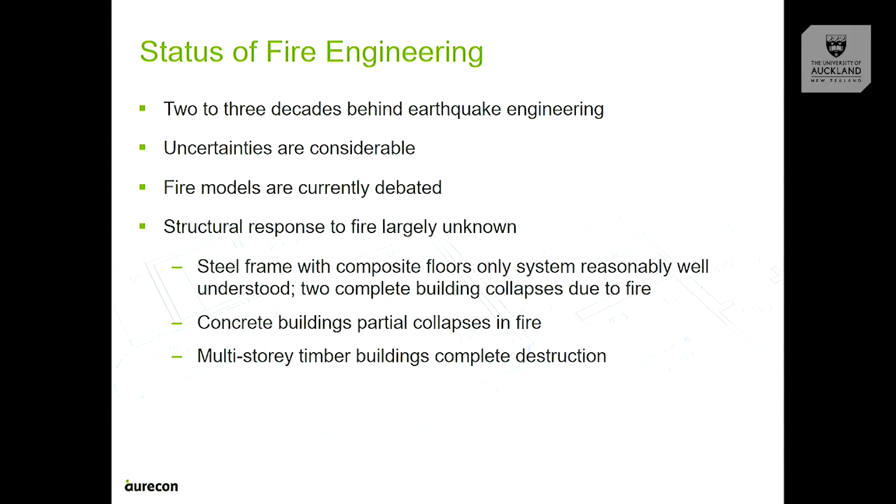So just before I start, because the theme says misconception, I'll play a video.

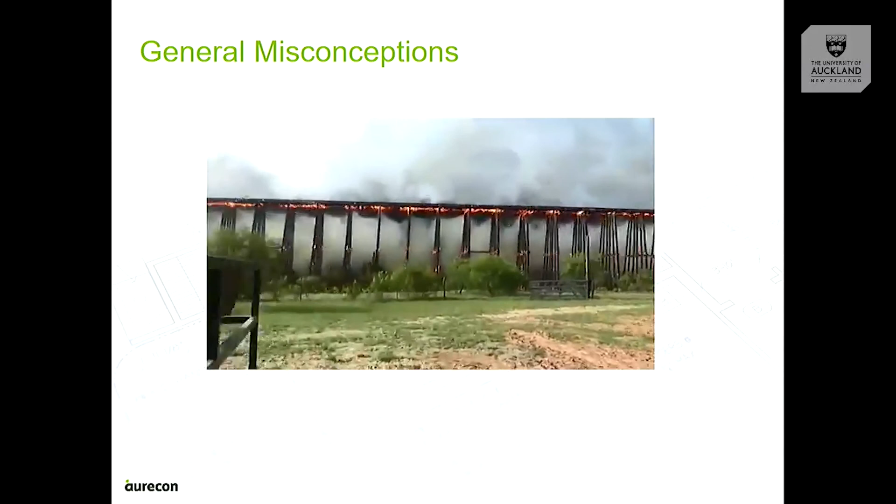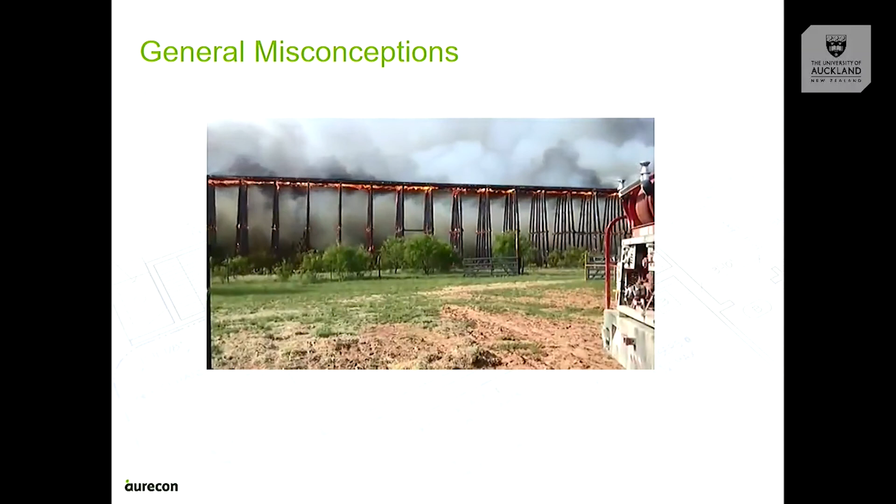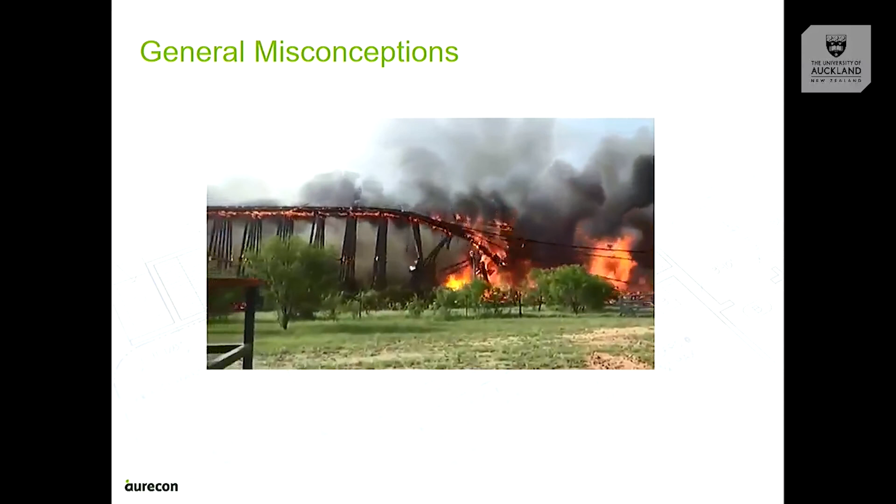This is a funny video I found online, and it illustrates the general misconceptions we have about structures and fire. This is a timber footbridge, and we can see the whole bridge is actually on fire. But what are the chances of that happening? It is happening - let's watch a little clip, and I'll explain at the end. So the firefighters are there, and this is what we have in mind: once there is a fire, the whole building comes down all at the same time. That's the general misconception we have as either structural engineers or fire engineers.

So that's what really happens in a fire, not the previous scenario. That could happen, but not in a building where you have separate fire cells, like we generally have here in New Zealand.

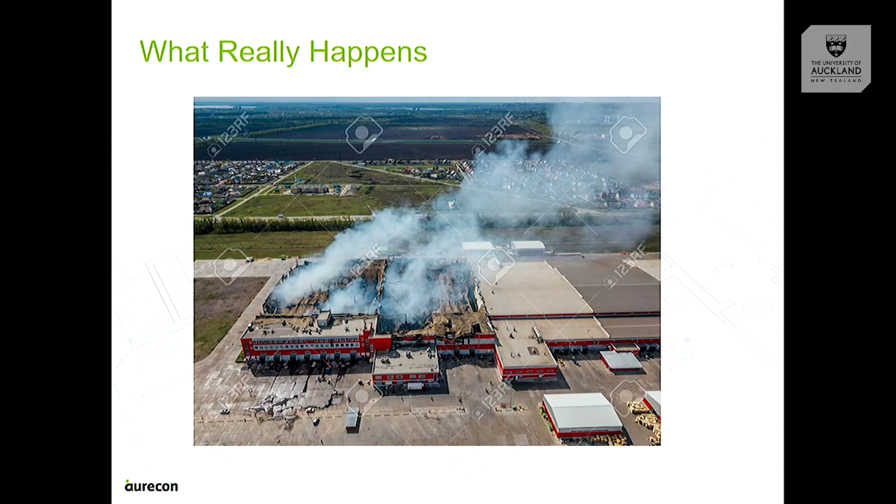So I'll just start based on the New Zealand Building Act. The Building Act basically is what holds us as professionals. This is where we tend to go to if there is either a dispute in our design or if we have issues - we go to the Act, which basically supersedes everything else. And the clause B1, which structural engineers design to, and clauses C1 to C6, which fire engineers design to, they're almost interwoven. But clause C6 is almost the same as clause B1. And why is that the case?

Clause B1 3.3 basically says account shall be taken of any condition likely to affect the stability of building elements, and it cites what - including, you can see the one in red, fire. It lists the rest, but fire is actually there. And clause C1, C6.1 says the building must maintain structural stability. Now, with structural engineers, we don't sign clause C6, but we sign clause B1. So whose job is it to make sure the building actually stays stable during a fire? Is it C6 or is it B1?

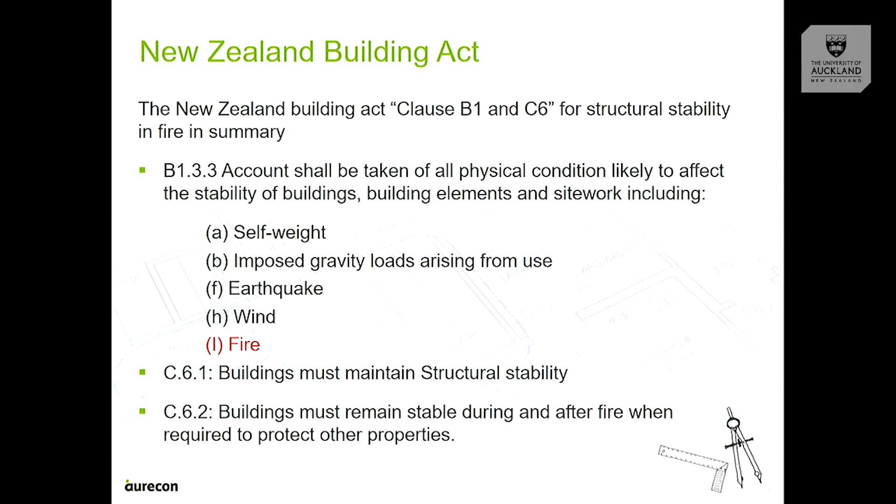Anyone? B1. Well, you can see C6 says the building must maintain structural stability. So why? Who's... not sure? Okay, now if you go into a fire engineering forum, they say, 'Oh yeah, it's there in our clause C6, we should sign it.' But then that's where you get the overlap. So most of the time you see buildings which are basically prescriptive based and not performance based. It's hard to tell who's meant to sign clause C6, but we sign B1, which covers fire as well.

And a bit about fire engineering, like I said - in fire engineering there are two main documents used to design buildings here in New Zealand in terms of fire. The first is called the acceptable solutions, and that's where you get your clause C1 to C6, and the verification method. So think about an ISA, okay? An ISA is almost similar to your acceptable solutions - you have different criteria you need to meet, and at the end you get the results.

You can see your verification method as a DSA - you still follow those requirements, but it's a much more detailed design. So the majority of buildings, for instance your residential housing, some warehouses as well depending on the height, and also your regular apartments - most fire engineers would tend to lean towards C1 to C6, or the acceptable solutions. And why is that the case?

Now when you see, for instance, if you have an ISA or a DSA and you get a client, obviously you want to get an ISA for the fee of a DSA, which is easier for you to do. And that's the main reason. Because if you go in with the verification method, you have much more rigorous things to do - you need to get a fire engineering brief, you need to speak to council, you need to get information also from the fire service, which is now they call them now?

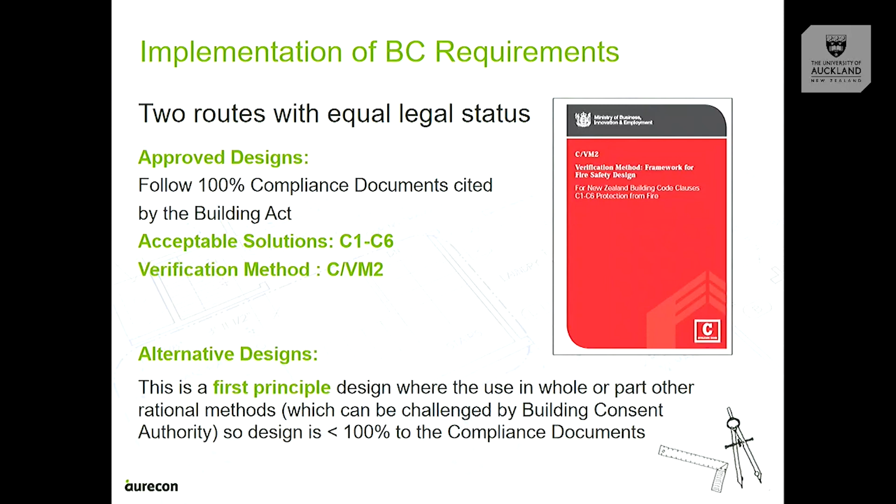Now, what is fire? Okay, for there to be fire anywhere in the world, any location at all, three things need to be present. You need to have heat, you need to have oxygen, you need to have fuel.

Fuel is not just your regular PMS, fuel could be anything. It could be a piece of paper, it could be firewood. Without the heat, there is no source of ignition, there is no way the fire is going to start. That is why, without these three components, we need to make sure during our design we check if one of these three are absent.

No matter where the building is or what it is, you're not going to have a fire in that building. Now, when you design your building and you have a stair or stairs, in general, do we keep materials free, say, under the staircase or in a stairs location? Anyone, do we do things like that?

No. So why do we fire rate it? Or why are we required to do it? It's an exit, but there is no fire, there's no fuel. Depends which way you're fire rating from. It's not an internal fire, it's external fire protecting. So it's an external stair.

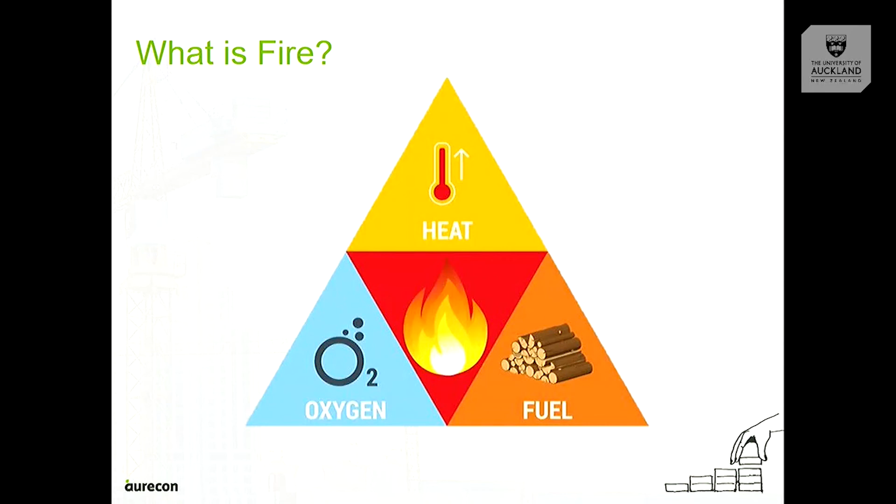Fire growth. Okay, so think of a piece of cigarette, or a lighter or whatever. If you light a match and burn a piece of paper, it's different from having a fire in a building, and that's because there are different stages of fire growth. So the first stage of a fire is where you have an accident. Obviously, no one wants to burn any building down except it's arson. It's an accident, something happens, and the fire gets lit.

And the next is the ignition stage, which spreads up to the flashover stage. So the point we're more interested in is called the flashover stage, and that's where the fire is hard to control. Take, for instance, you burn a piece of matches, it's not going to get to the flashover stage because there isn't enough fuel, or there might not be enough oxygen to get to that particular level.

So by the time we get to the flashover stage, the fire would be almost uncontrollable. It's going to be very difficult for us to control the fire, and that's why we need to get the fire service in, and that's where our members start getting to their limiting temperatures and things like that happening.

But looking at the curve, in majority of cases, when you have a sprinkler system, the sprinklers have been triggered by the heat in the room or wherever they're located, before it gets to the flashover stage, your sprinklers would have been activated. That's why majority of the time, the fire doesn't grow to an extent when you have a sprinkler in the building whereby it's going to be uncontrollable. You can see the curve, the dashed curve, which is the curve for a fire having a sprinkler system.

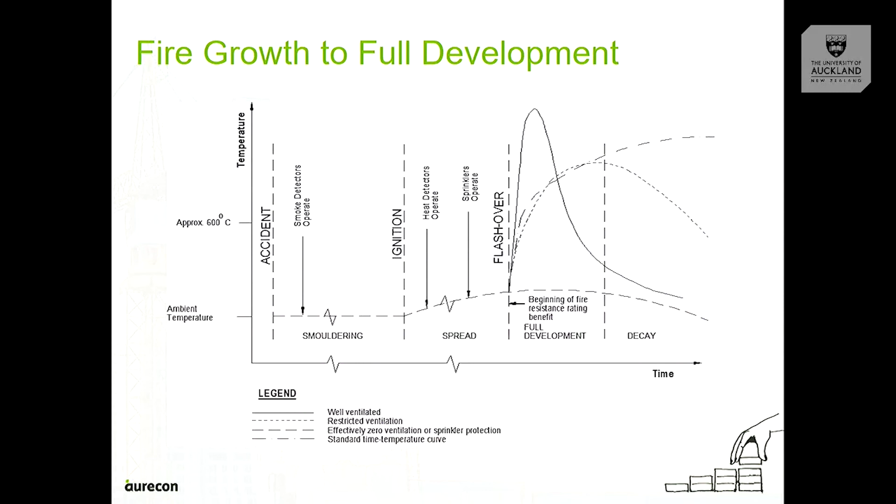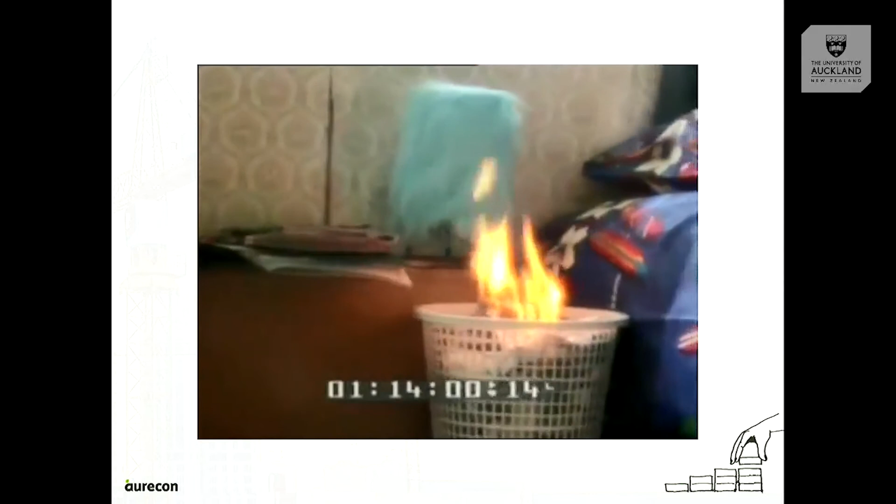So this video again shows how fast it takes for a small fire, starting from a piece of blanket or something, to generate into a very uncontrollable fire. This is an experiment basically trying to see how fast it's going to take for it to become an uncontrollable fire. They just lit a little piece of blanket and it keeps burning.

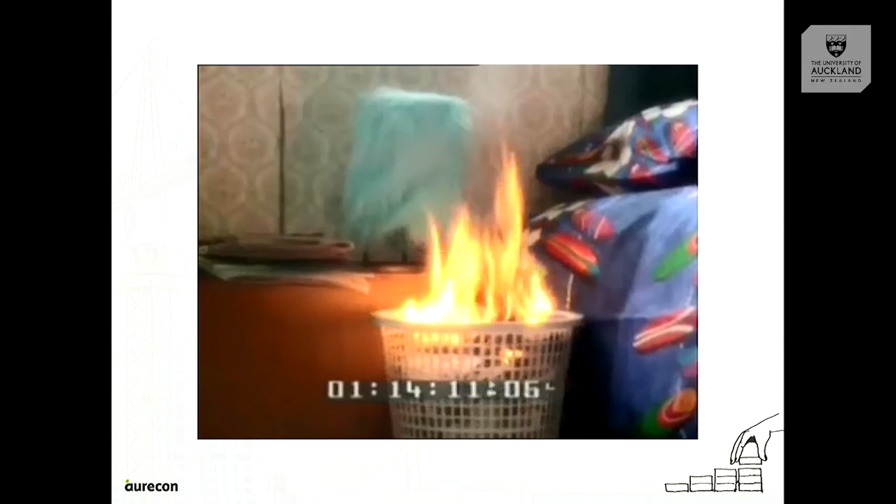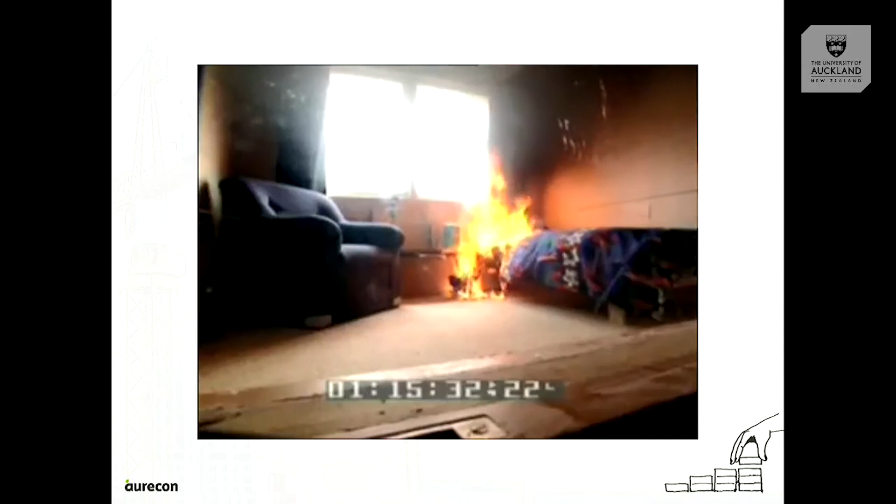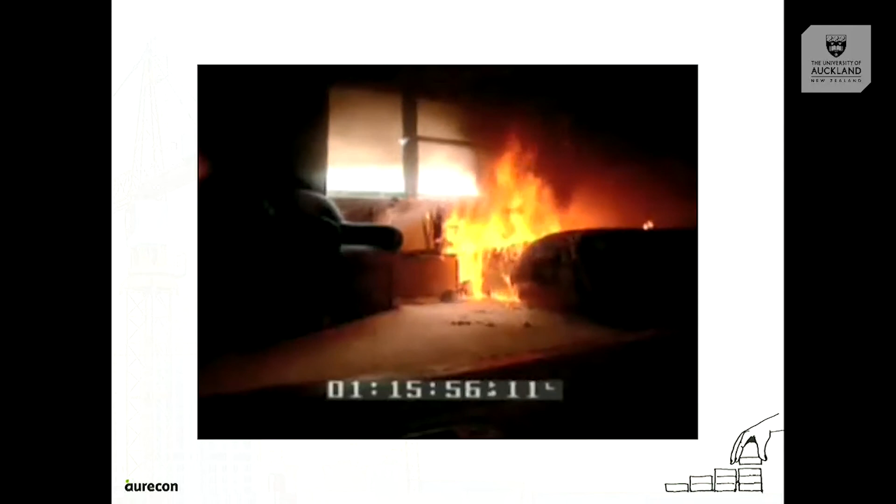Now it gets to the blanket, and this is a full room. It keeps going, and there you go. That's where it gets to. In less than about 5-6 minutes, it gets to a full fire which they cannot actually control.

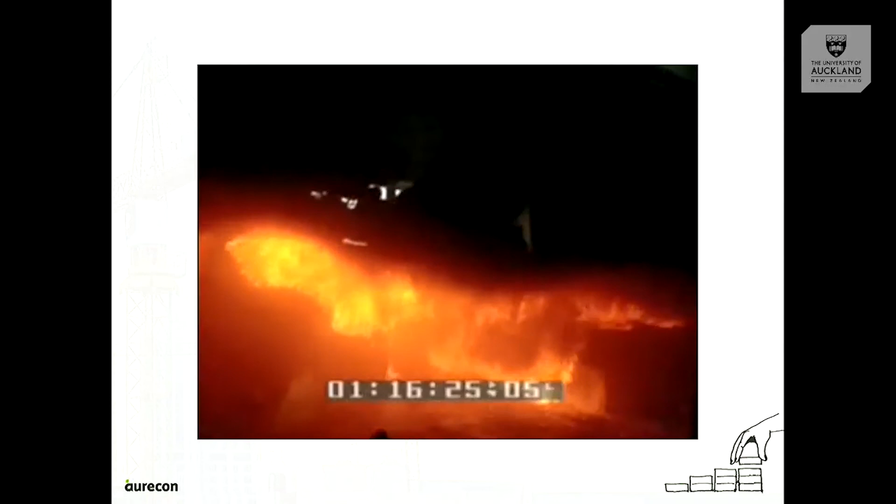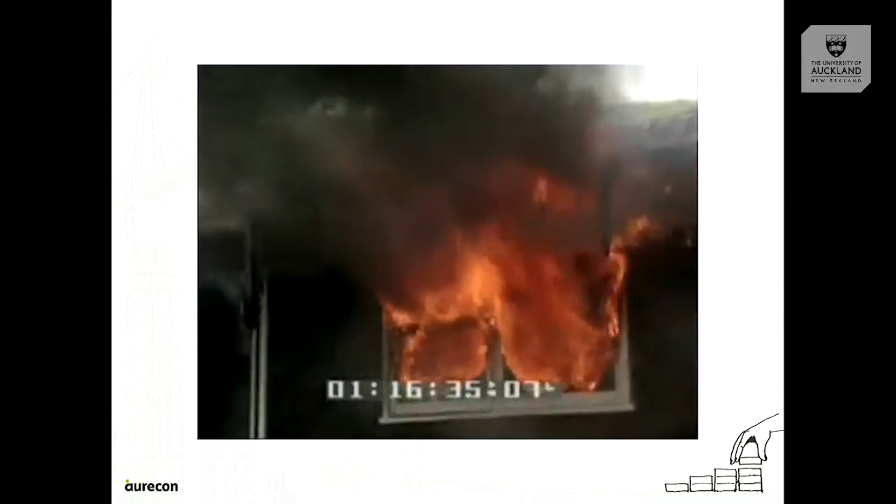This is what really happens in a real fire. It starts from little, and that's where you get a flashover stage. All your windows start to break. Why? Because it needs more oxygen. With oxygen, you get more fire in your building. And that's all about fire engineering.

What we usually do in most cases is analyze individual members without looking at the global structure. That way, we often don't know how the whole system works as one, not just individual elements. The fire resistance of the system is typically higher than that of the individual members. So if your beam has been designed using AS4100 and rated for, say, 30 minutes, the system might be about 40 or 60 minutes in any case.

But how do we do that? We need to do more analysis. We need to get information from the fire engineers - for instance, we need to know what the fire load is. We don't just look at a small piece of a room with a fire.

Inelastic response will occur in fully developed fires as well, and detailing is important with unprotected beams. I'll talk more about this - it has to do with your connections and how they're actually detailed for fire.

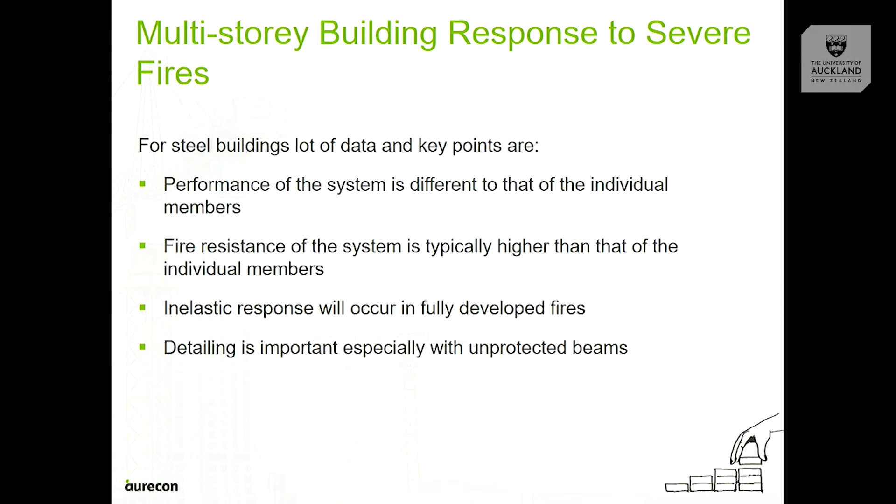Steel columns - how do they behave in fire? What do we know, and how do we get the information? The gravity load and wind load definitely apply during the fire. Not too many times do you get both a seismic event and a fire event at the same time, but there will always be gravity loads there, and there will be wind.

During fire, what happens is the column heats up - this is for structural steel - and it expands. Once it expands, you'll see the floor above starts to jack up. So basically you're having a fire in a column, and this column starts to jack the floor above as it expands. The axial load starts to increase gradually, and the restraint of this expansion increases the column's compression load, meaning once it starts to expand, you get a higher compression load in the columns.

The effects on the column depend on whether the column is very strong and stiff - it jacks up the floor. But if it's not strong enough, it just squashes or buckles. So those are the two things that could happen, depending on how the column is restrained, whether the temperature is high enough to expand the column, and the rate of expansion based on the temperature in that particular room.

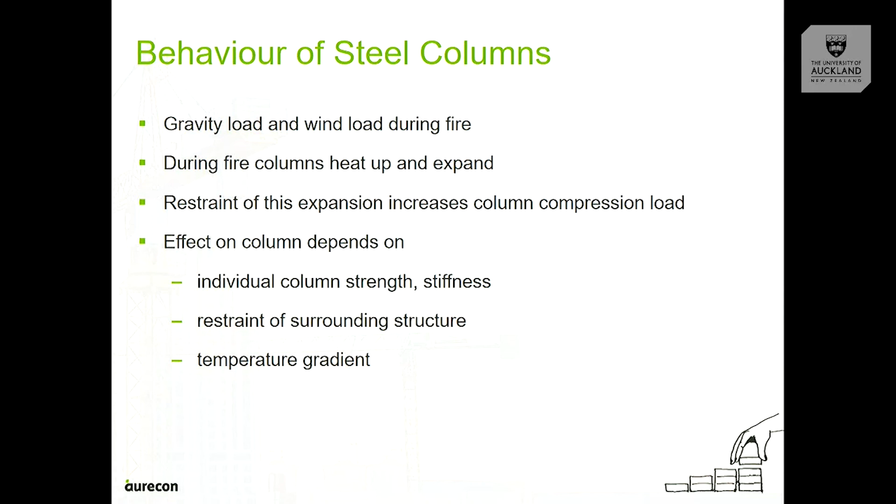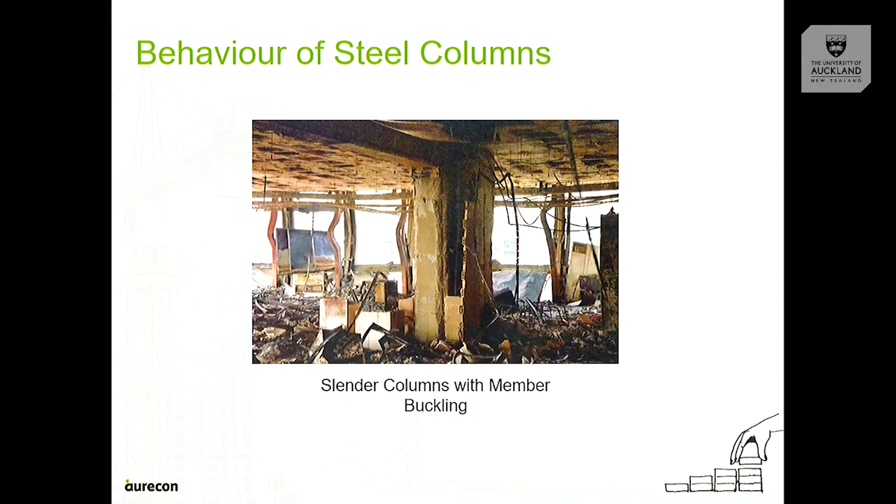So these are what we know. This is a test - a very famous test done in the Cardington fire down in the UK. These are slender columns - what happens with slender columns, remember, is they actually buckle. I'll get a much clearer picture in the next slide.

But for stocky columns, what we noticed, or what's usually the case, is at the top you actually see local buckling of the particular column. The column tries to expand, and once it gets to capacity, it drops - that's where we get the local buckling of the actual columns.

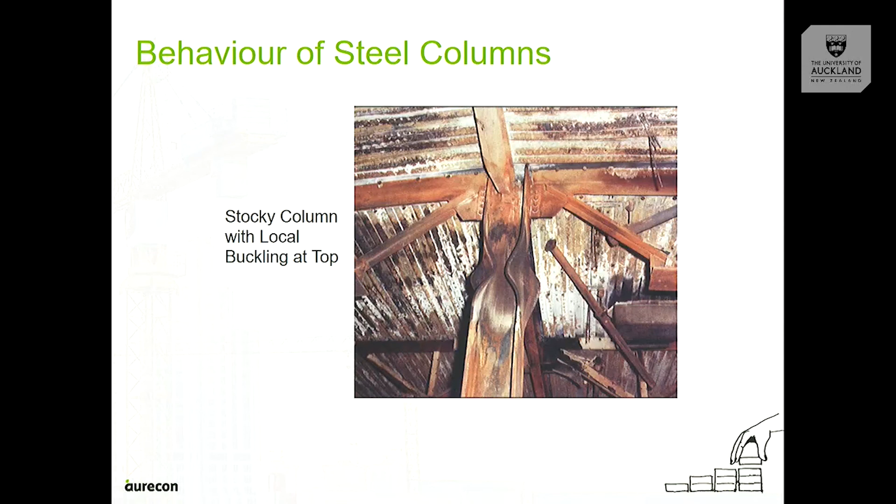So what about the behavior of braced steel systems? The same way we have our members when we design for seismic or earthquake, we have our EBF and CBF. So what happens to the EBFs or the CBFs in a fire? Remember, the majority of these members have been designed to take our lateral loads, which means the gravity loads in this system would be minimal.

And in most cases, the take home would be we can actually leave them unprotected. And the way we do that is clause 3404. There's a calculation on the limiting temperature, and once we get the limiting temperature of the members, we could design the members and get the fire resistance or structural adequacy of that particular member in a fire.

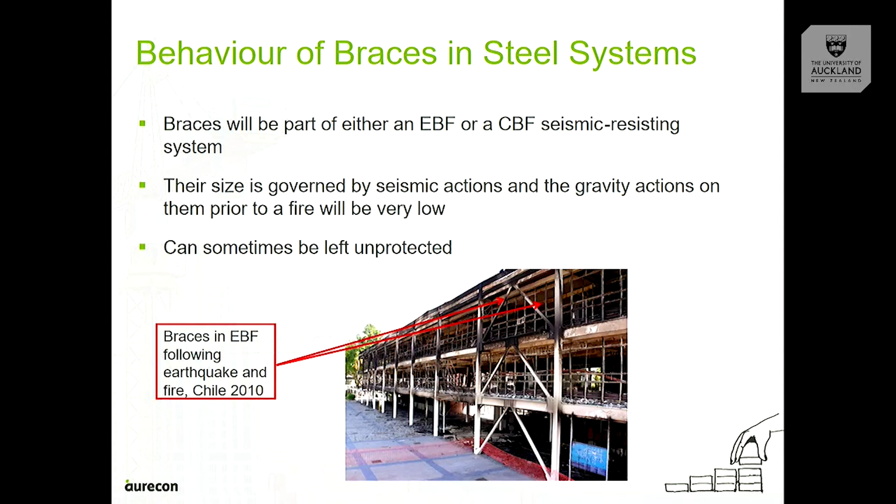Also, sometimes due to different bays we would have a fire cell, or have the members in two different fire cells. A fire cell is basically a room which has been fire rated all around and at the top, which means if it's fire rated for 60 minutes, the structure or the members blocking the fire wouldn't collapse till after 60 minutes. So if you have a bay with a wall rated for 60 minutes, and there's a fire here, the other bay would stay intact for more than 60 minutes. So when you have the EBFs in one bay with different fire cells, you could actually leave them unprotected. And what about the steel beams?

During the fire load, as well as wind and gravity, the temperature gradient causes the beams to sag. For most of us who've done work on the slab panel method, we see a lot of deformation of the beam, and that's due to the fire as well. During fire there's an increase in temperature in the beams, and what happens is at the supports the beam starts to expand, but at mid-span it buckles in or deflects very much, which is very visible. This is the same photo from the Cardington fire in the UK.

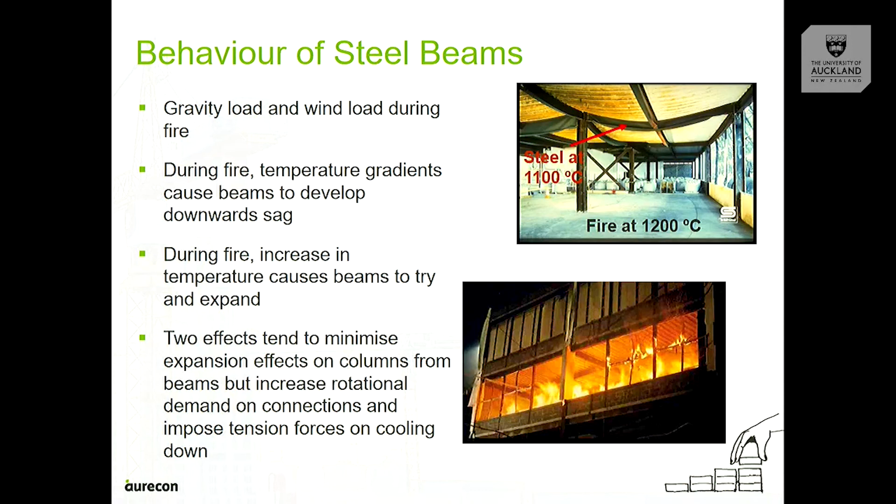So the system tends to minimize the expansion of the column from the beam, but the rotation demands on the connections get higher. At the supports they start to expand and start to twist, and that way your rotational demand means the connection itself has to be well detailed. This is why I talked about the connection itself.

So the behavior of steel frame connections - during the heating phase, the connections are subjected to negative rotation and minor axial compression. Once you have your beam-column joint and the beam starts to expand, it puts a lot of tension into your actual connections. This is why the detailing of the connection, or the rotational detailing, has to be well done. But the good thing is the detailing we currently use for seismic rotations in columns is actually sufficient for the fire design of these members.

The connection with no inelastic reserve strength in fire must be avoided. It's going to be catastrophic if your beam-column joints fail in a fire. That's one of the worst case scenarios that could happen in a fire event.

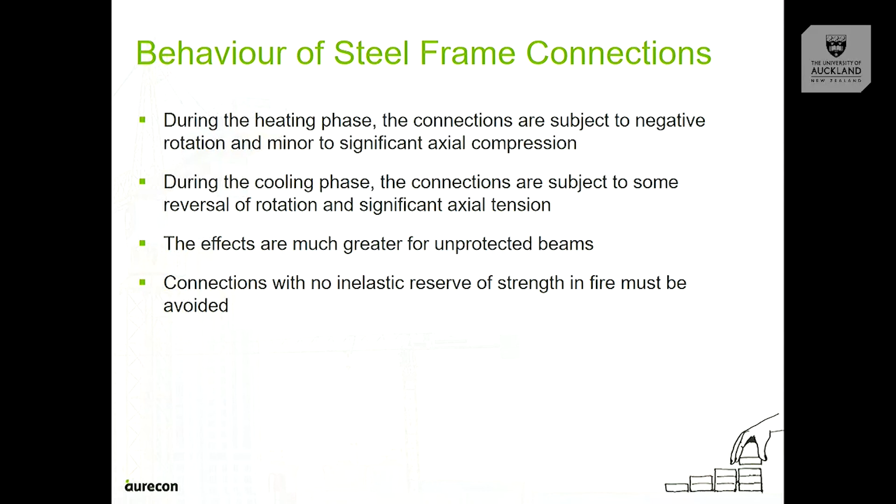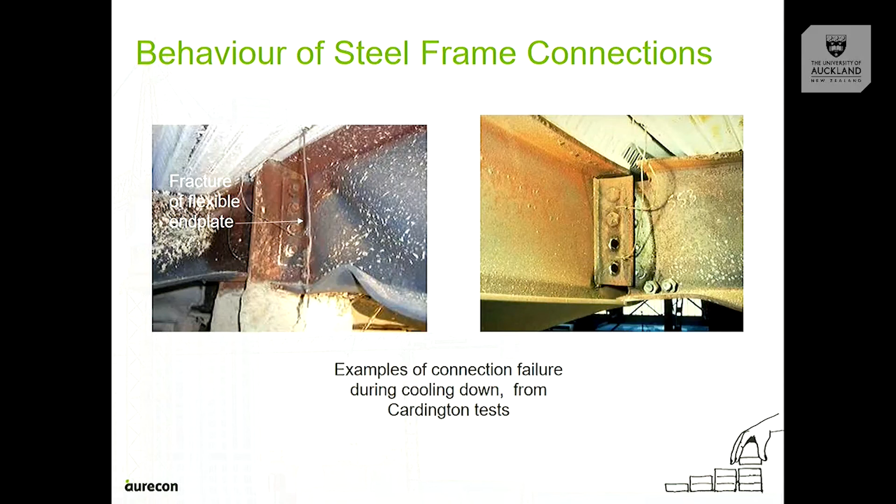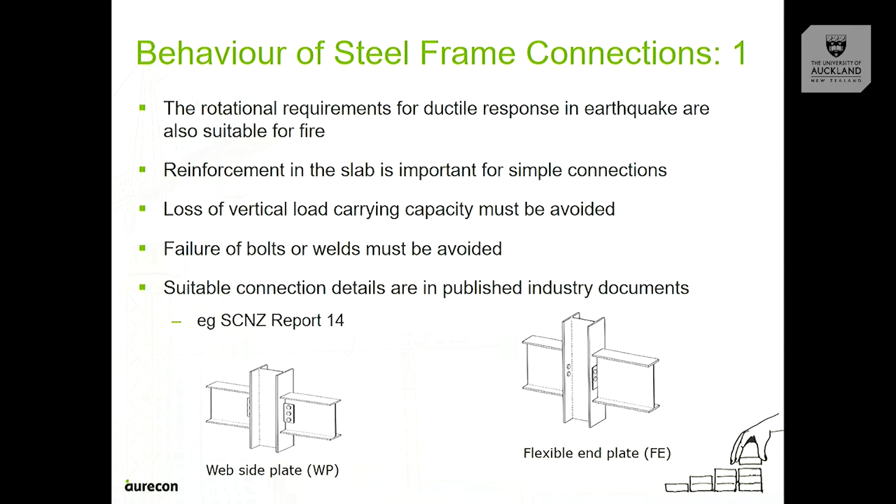So first of all, the rotational requirement for ductile response in earthquake is suitable for fire as well. And we can get some design materials using the SCNZ Report 14.

So what about the floor systems? How do they behave in a fire event? The majority of tests done are usually on composite floors, and the critical direction of fire for the floor system is usually underneath. That's why in fire engineering, when you fire a member, you go from the underside of the member.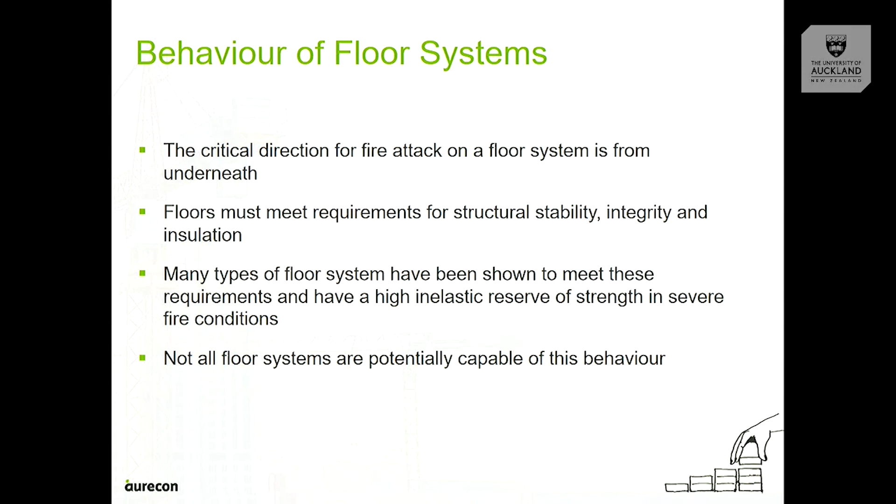So if, for instance, this is a fire cell, what we need to do is make sure we fire the underside of the particular floor. Not all floor systems are capable of this behavior. For most concrete floors and composite floors we understand the behaviors, but there are some particular floors which are questionable, and I'll get to that in the next few slides.

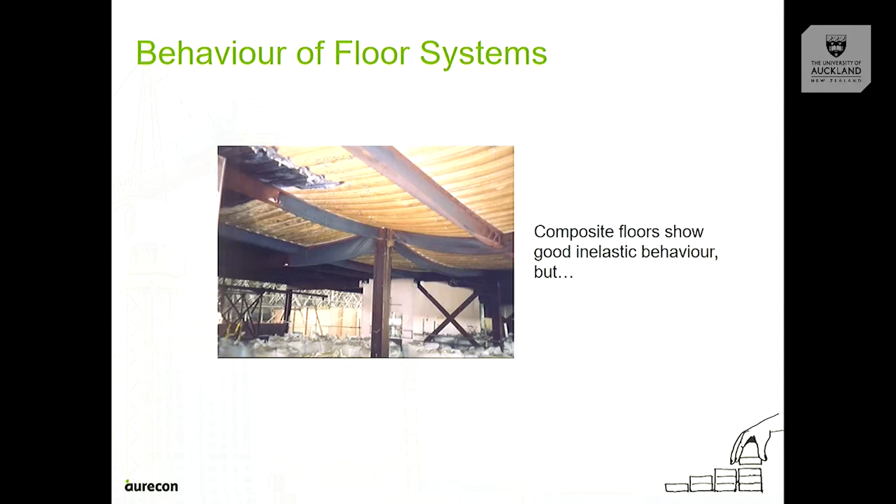So a composite floor shows good inelastic behavior. We can see the floor didn't fail, the beams just sagged, and those beams are all unprotected. That's exactly what happened in the experiment. But we can see at the top here, left-hand corner, the major cracks in the floor.

Now think about it, if this were, for instance, an apartment, and that's your kitchen, and probably your neighbor had a fire or something, and you come and walk into your kitchen and you see your floor sagging in such a way. Obviously, you're not going to be happy about that.

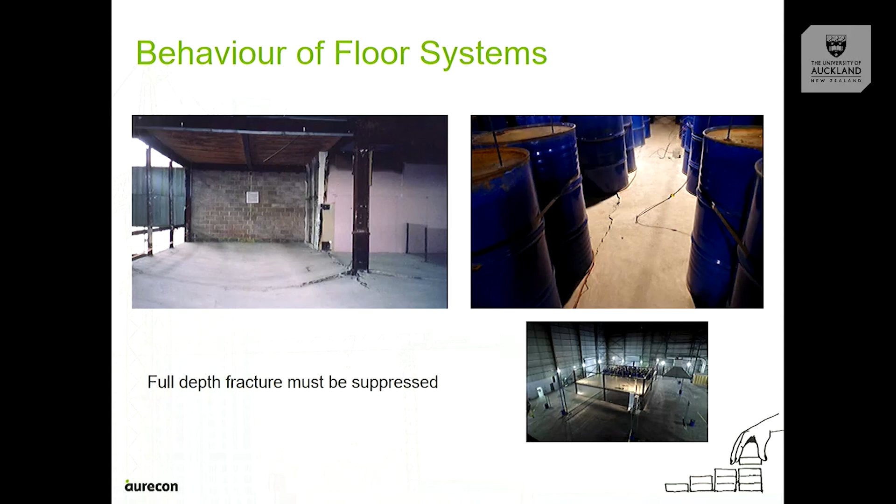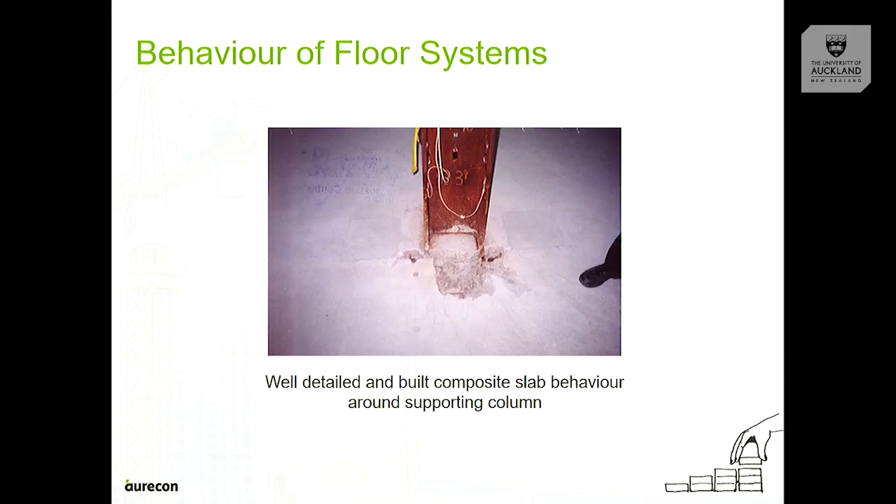This is one of the reasons why during your detailing, at the location where you have the columns, we need to have some extra tension members to help in the support so we don't have this kind of punching shear we're having in that location. So a better detail would look like this. When we have the bars, that's why we have the minimum cover during design, and also the number of bars - I think HD12 is the minimum - you put in your floor to make sure you get that tensile capacity, which would be increased due to fire.

Your tensile demand would be increased, sorry. Unprotected steel behavior in severe fire.

So we've tried to understand how these sections behave in serious fire. First of all, exposed steel elements may reach close to the temperature of the surrounding gases. So usually, if the room is about 1200 degrees, the unprotected steel would be about 0.95 times whatever the gas temperature is. This is just a kind of an estimate to know what temperature you're going to be getting.

The beams will always sag downwards, that's what happens. The columns would always undergo axial expansion, but once it gets to its ultimate state, it actually squashes, or you could get local buckling, depending on how it's been restrained. The extent of deformation depends on the member shielding by effective radiation barriers. Radiation barrier could be your intumescent paints, or boarding all around your members. If directly exposed, what expected maximum fire temperature and duration would you get?

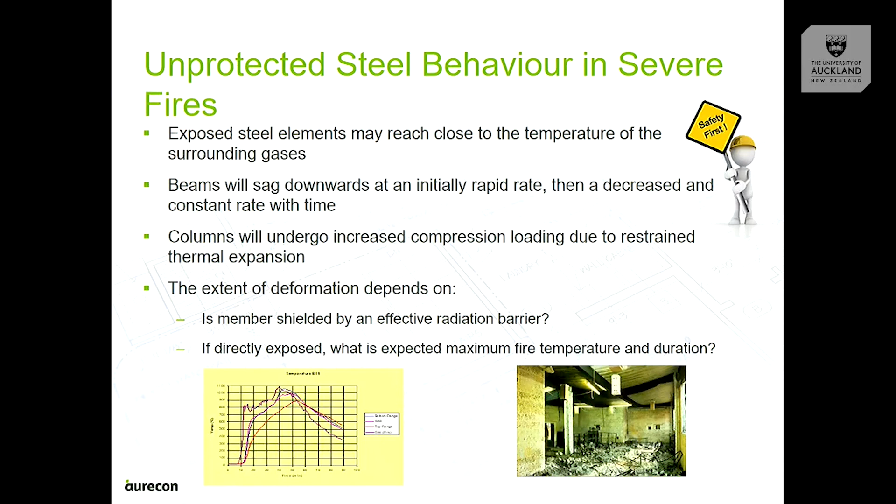No one knows, except you design it, not by prescription-based, but by performance-based. What about RC concrete? The majority of the people in the room are all happy with their reinforced concrete design in terms of fire, but then...

Again, 3101 section 4 gives you different sizes and different thicknesses of your members, but there are ways they could actually be engineered from first principle, and we can actually come out with a smaller size compared to what is actually in the code. This is where you get back to your alternative design or your first principle design as a fire and structural engineer.

So solid concrete members are robust in fire. The only take-home is for hollow cores, it's a bit questionable currently. There's been quite a few research on hollow cores in terms of fire, but it's still a questionable material.

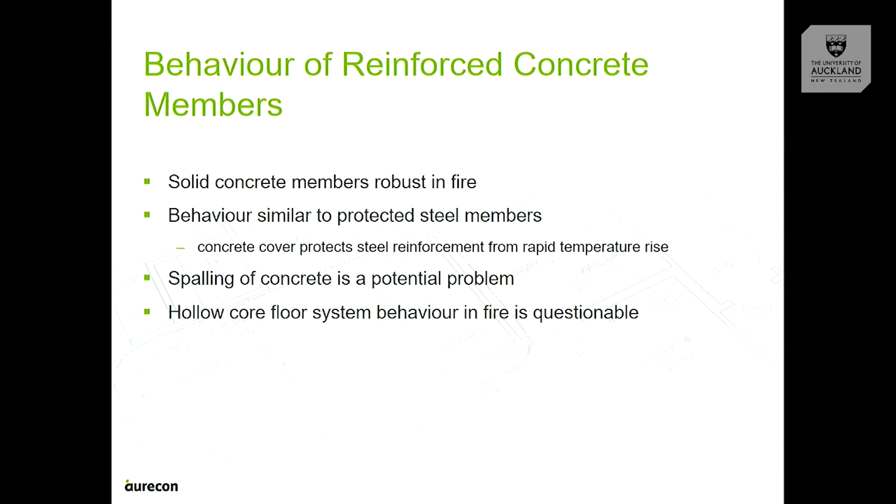And one major issue we have with concrete is spalling in fire. So what happens is, during a fire, all the water content gets dried up, and due to that, you get spalling of the concrete. Could be your columns or your beams.

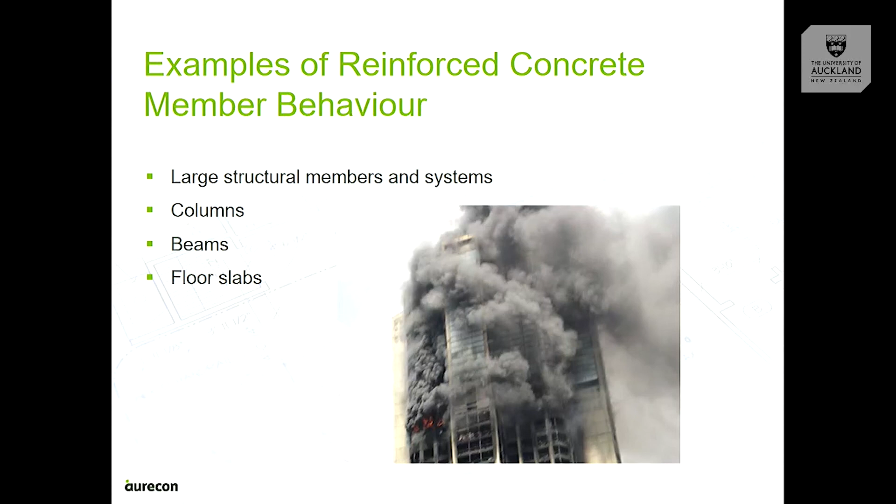Examples of reinforced concrete members behavior. So large structural members and systems: columns, beams, floor slabs. This is a full concrete structure. It's hard for it. It depends on the various elements that would determine what we're going to expect from a concrete building.

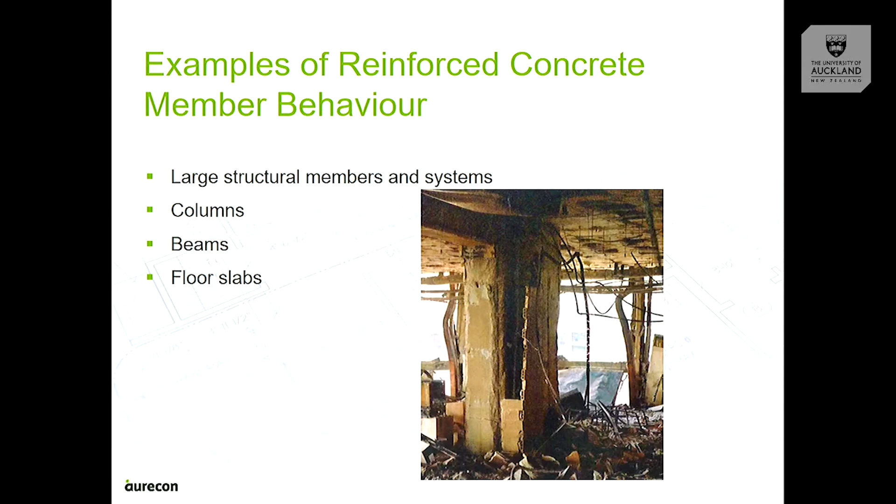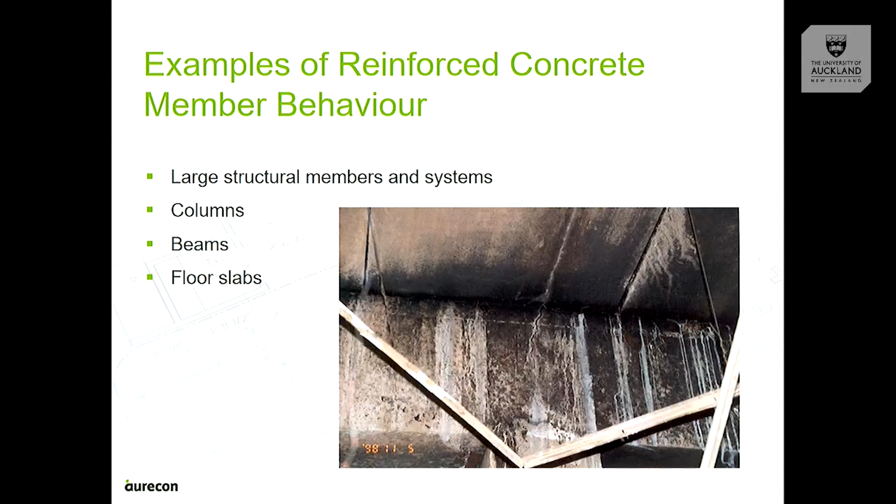And what we understand is the columns usually either expand and then contract, or we can have spalling of the concrete itself. For the beams, usually we get cracks, and these cracks are induced by the expansion of the concrete itself and also the contraction of the concrete. So once the concrete gets heated up, it loses all its water content and starts to crack. And once you get a little bit of crack, it propagates to the other parts of the concrete.

And this is one of the floor systems which was mentioned previously. The floor slab, although the majority of the time they perform very well, but not all the time.

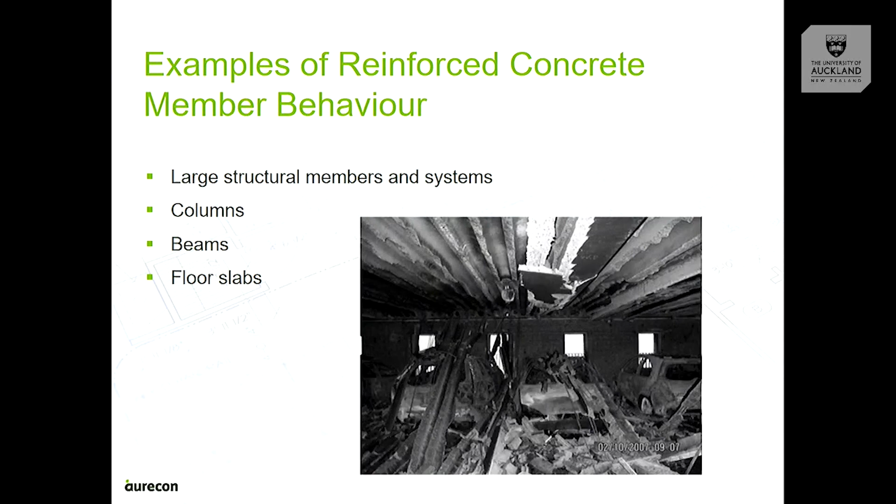For the behaviors of timber, the exposed surface char rate is well known. We understand timber and have calculations to get the char rating of a timber structure. Individual member fire resistance is similar to the fire resistance of the entire system, which means for a member to fail, it's most likely the entire structure fails, since the structure is mostly dependent on individual members for a timber building.

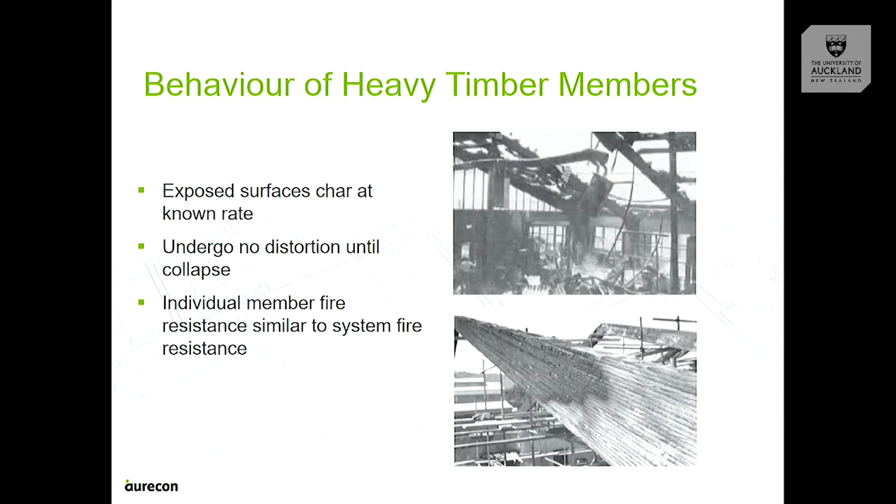Timber wouldn't undergo distortion like a steel section that starts to sag, or concrete that starts to crack. For timber, it just gives up once it starts to char and reaches a rating whereby it cannot hold anymore, it just collapses, for instance for a timber beam. So most of the time, we understand the behavior of this material in fire.

Individual sections of lightweight timber, which we use for residential buildings, may contribute to the fire load. So if you have, say, a lining which is not fire rated, the timber itself in the lining contributes to the fire load in that setup. That's why for lightweight timber used for residential buildings, the behavior is pretty well known.

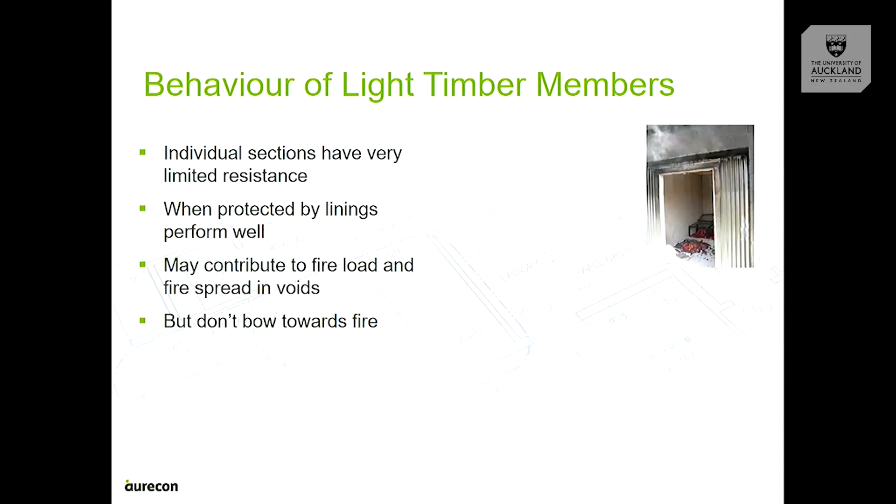These are some photos from fire tests that were done, showing how these timbers actually collapsed. This is a steel portal frame structure, a warehouse, and this is a concrete frame building, a concrete structure as well. Both of them actually collapsed in fire.

So which of these structures do you think has a better capacity, or would perform better in fire? Is it the one on the left, which is a steel frame building, or the one on the right, which is a concrete building in fire? Which one?

Is this a laminated beam? No. So the left one here is a steel portal frame building, and the right one here, it's very difficult to see, sorry, the right one is a concrete building. So which one do you think, a steel portal frame building or a concrete building, will perform better in fire? Concrete - all right, everyone says concrete. Well...

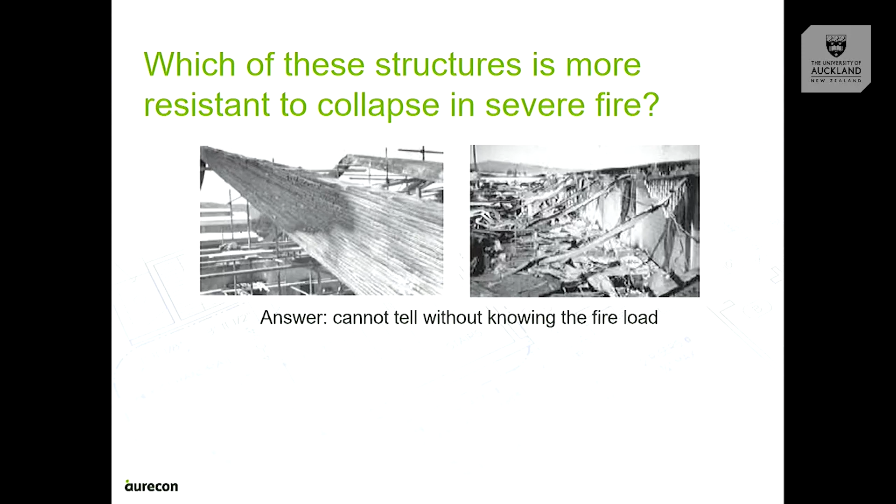Seriously, you cannot tell without knowing the fire load. If I have, say, a steel portal frame and just a piece of paper burning, that's fire too, right? Exactly, so basically they have different fire loads, and that's where alternative design comes into play. Once you know the fire load, you could know what temperature you're having in your building, and you can engineer your building to perform even better.

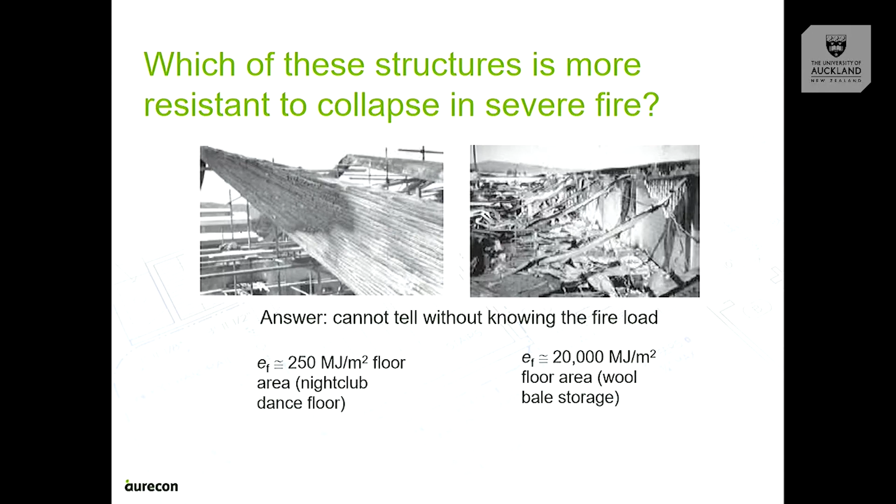Same question: if you have a member outside the building where there's nothing, nothing on the footpath, do you still design that member to the same standard as, say, where fuel is stored inside a particular building? Exactly, that's where the alternative design comes into play.

Fire following earthquakes - there have been a few places where this has happened and it actually caused serious issues, but the good thing is in Christchurch we didn't have this during the Christchurch earthquake. But in places like Kobe, Japan, I think that was in '95, there was an earthquake, and after that there was severe fire.

One of the disadvantages is that some of the members used to provide, say, your water tank to supply water into your pipes for sprinklers - if there's an earthquake and they all fall, we don't have water, we don't have our active system, which is the sprinklers, to actually put off the fire.

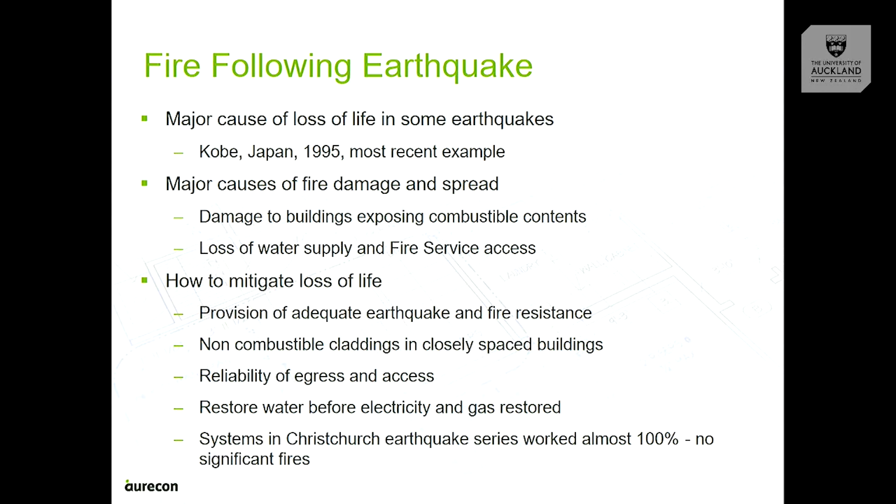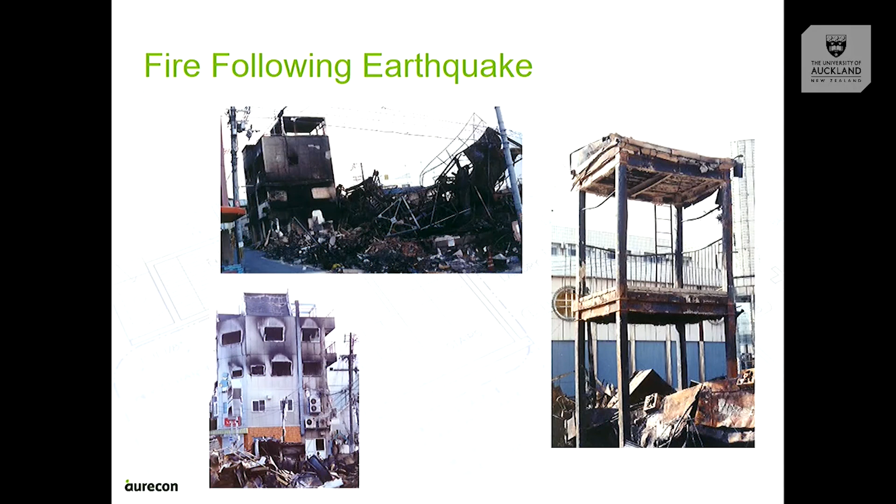So things like that usually happen, but not in every case, which is why the majority of the time people tend to overlook things like this. But I think in the future this is something that might come into play when you design for seismic - you have to check the after effects in case there is a fire. These are some slides showing a few things that happened in the past, fire following an earthquake, and like I said, what really happened was loss of materials to supply water.

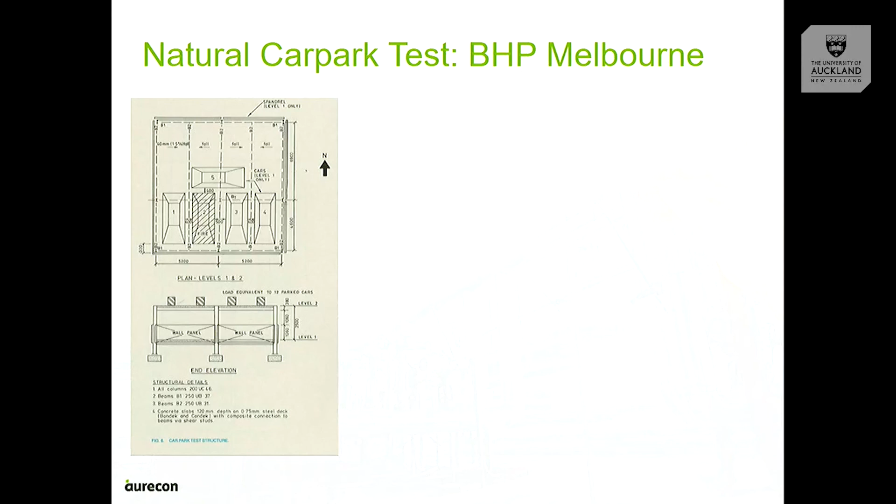Also the tests done by BHP in Melbourne for a car park - this is one of the very well-known aspects of structural fire engineering currently known in New Zealand, for car parks. I think SCNZ has a very useful guide for car park design based on alternative design, so if you want to design a car park anywhere in Auckland, you could use that document - it's really, really helpful.

I haven't used it personally, but I've had a read of it. And I think I can see a few people who were authors of the book, who actually did most of the calculations, in the audience.

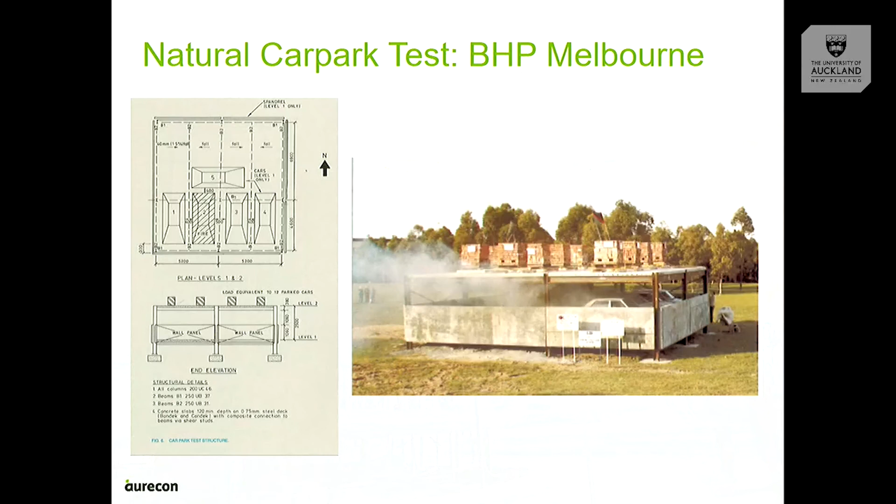This is a test, trying to understand what happens in a car park if a car is on fire. The fire loads generated from a car park are usually higher compared to an enclosed building, and that's why this test was done, to understand the behavior of actual cars if you have one or two in fire, and how it spreads to other cars.

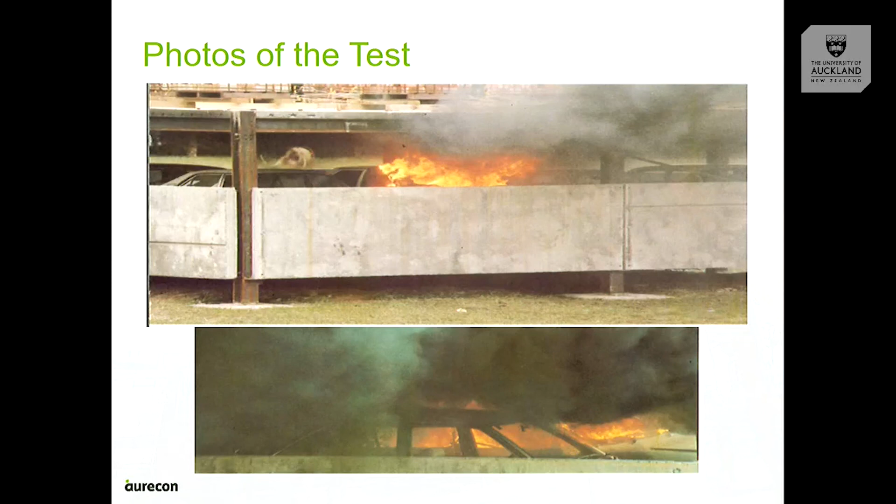So the lesson learned from the Cardington test, time's almost up, I'll rush through. This test was carried out in the UK, one of the biggest fire tests which has ever happened, and the majority of people involved were structural engineers. That's why it gave the perspective of a structural engineer on how fire affects our structures. So they built an 8-story building just to test different parts of it to see how it behaves in fire.

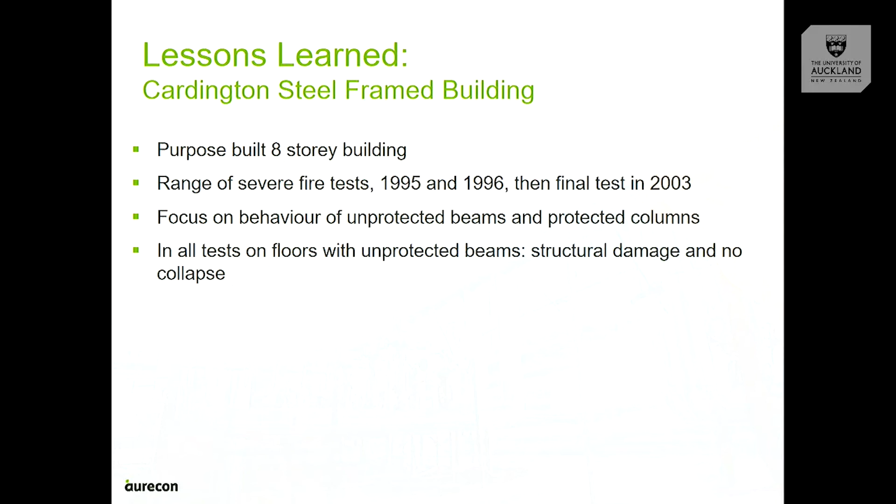The range of severe fire tests were in '95, '96, and the final one was conducted in 2003. In all tests with unprotected beams there was structural damage, but no collapse of the building. So this is what the building looks like.

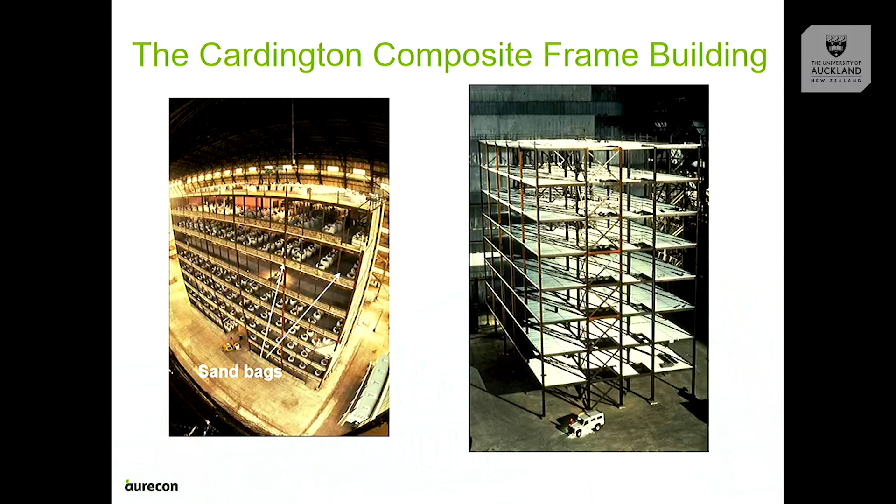They had sandbags put in the building to represent human beings and gravity loads. They tested different compartments of the building to see how the system reacts, not individual members. There were so many lessons learned, and there are still lessons being learned from this test today. Majority of the time, the way we know more about fire is when it happens, not through tests—it's quite an expensive experiment to carry out.

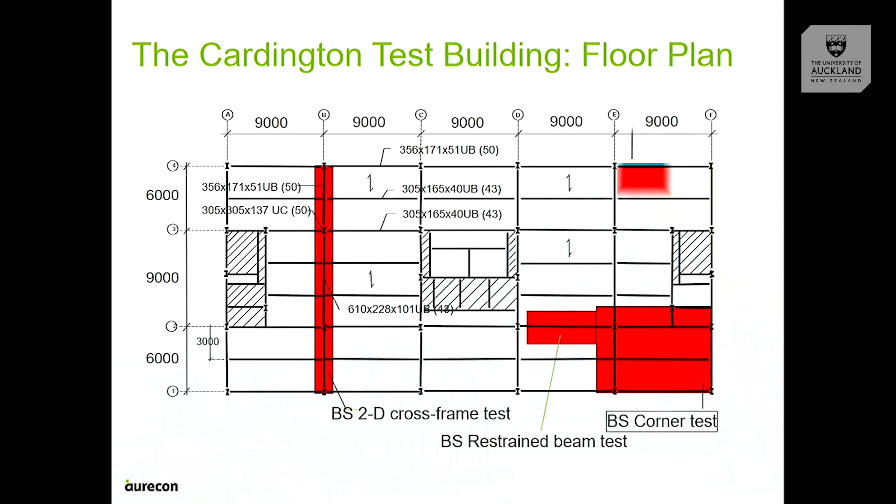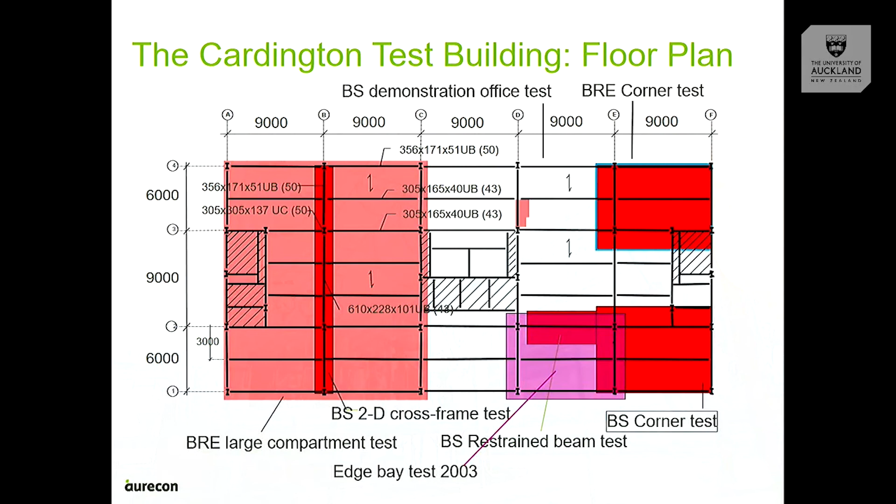So this is the floor plan, and tests were carried out on the BS restrained beam test. They had one on the frame, another test at the corner, another one at another corner, and a whole compartment tested. They also had a small office and the edge bay tested.

So, lesson learned: unprotected beams that are part of the structural system have higher fire resistance ratings compared to what we currently design for, till date. The composite floors performed excellently well. Bare steel beam—like I said, the detailing is where everything lies. If the connections are well detailed, they usually perform better.

So redundancy enhances load sharing, which increases structural resistance to severe fire attack. Basically, if one member—say a column in a fire cell—gives up, you have load transfer to the other members, and that way you get a better capacity out of your entire system, not just the individual members which we currently design for.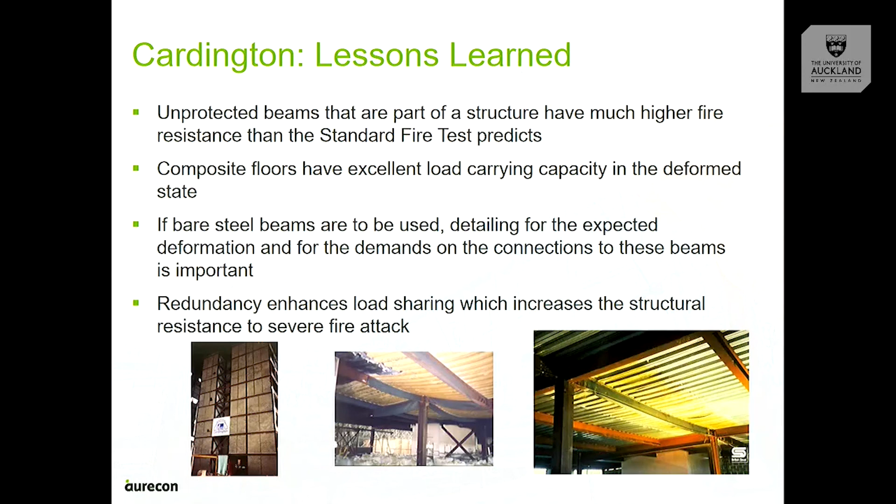Lesson learned 2: structures need redundancy and robustness. Fireproofing needs deformation capability. For instance, I see people putting intumescent paint and having a timber stud beside the steel section—that's not going to work. I don't know what to call that, but it's something I see more often, and yeah, it's laughable.

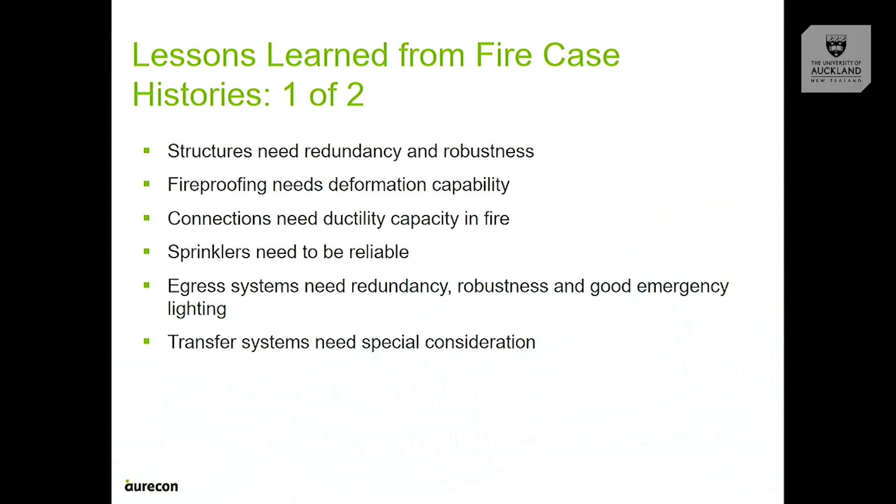Sprinklers need to be reliable—if you have a seismic event and you lose your water, you don't have the sprinklers there. Also, the egress system needs redundancy. Transfer systems need special consideration—if you have a transfer beam, it needs very special consideration.

And lesson learned: once a moderate to high fire load reaches full development, it is likely to spread significantly. So many things happen, so many buildings where we've seen this happen—a few of them were on the news recently. Structural damage from a fully developed fire is actually extensive, and it spreads very fast. The way fire spreads, we've seen it in so many buildings—you have bad cladding or whatever, and it gets the fire spreading quickly.

A well-designed and detailed steel frame with composite floor is actually one of the best ways to design for fire—composite members perform very well in fire. And that's it for me today. Thanks for listening.